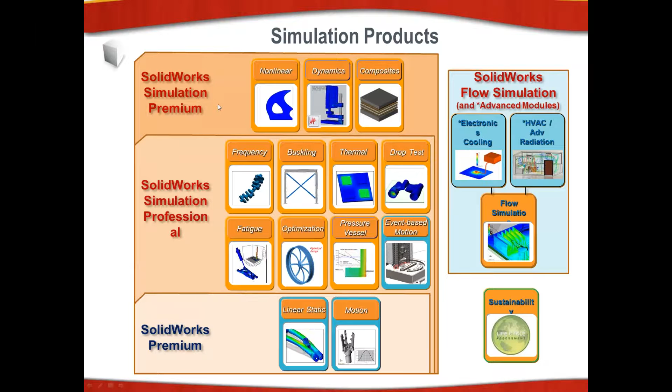All right, so some of the simulation products that we have, we're going to pretty much play in the SOLIDWORKS Premium area right here with some linear statics. We will show you a couple of 2D simplifications, which are in the Professional and Premium products, and just a couple other little cool tips and tricks to kind of get you where you need to be.

So let's start off with the simple little bracket. One of the things that I like to do is to simplify with configurations. Occasionally the actual model that you manufacture may have a lot of extra detail on it that we can pretty much neglect when we're doing our FEA analysis, our stress. So a lot of times I'll remove some small features. I've got some little fillets on here, some little chamfers, so we need to get rid of those things. And you really just have to make assumptions as to whether or not those are necessary features. If they are, then we need to do something about them.

Also, instead of actually modeling up a washer, a lot of times I'll use the split line function, so I'll show you how we can do that. And then in this case, the part is symmetric. In a symmetric part, it's really simple to just slice that thing in half. The main reason we might want to do that is the fewer mesh elements we have, the faster it is going to solve.

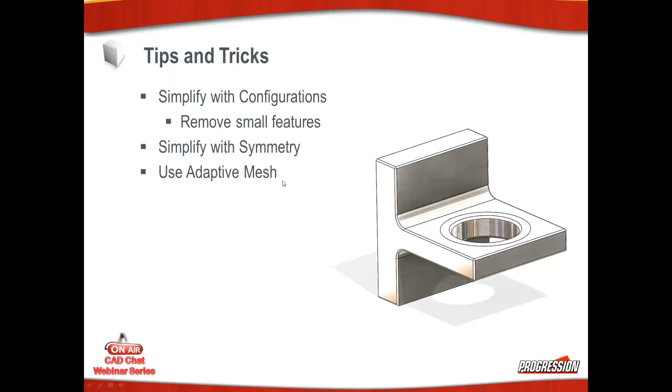And then the last thing I'm going to show is if you can't figure out exactly where your higher stresses are going to be, and you need to find out where your mesh refinement is going to be, we can use tools called adaptive mesh to get the job done. I'm not big on the PowerPoint, so we're going to go ahead and switch right over to SOLIDWORKS.

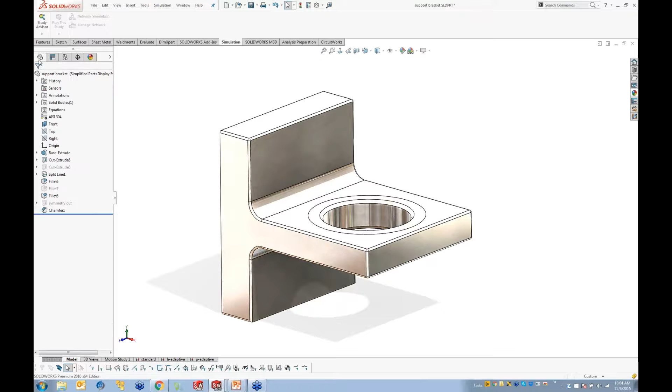So here's my 3D part. The first thing I want to do is create a configuration, and I'm going to do this from scratch. So I'm going to add a configuration and just call it simplified part. There we go. Then all you have to do is come into the features and get rid of what you don't want. I've got this extra little chamfer on here, so I'll suppress that. If I delete it, then it's going to delete it from the other configuration, so if I have a drawing off of it, that's not going to be a very good deal. I need to just suppress it so it's only for this active configuration.

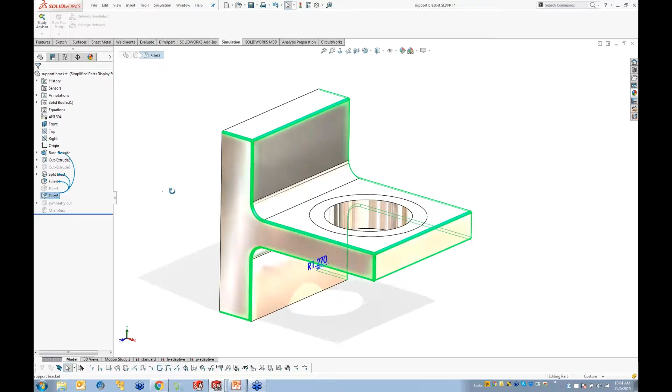You can see I've got all these extra little fillets on there, so we need to do the same thing and just suppress those. And also, if I know that this is symmetric, then I can do symmetry across the side of this thing, and I've already got a cut that I can do that with.

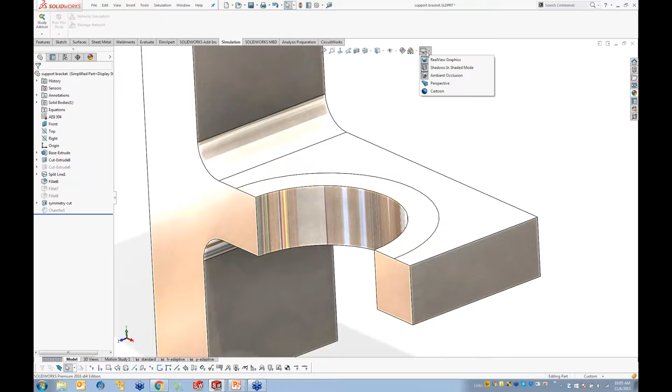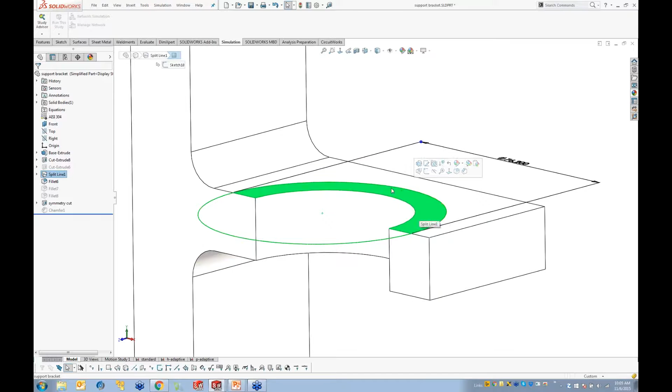Now, across the face of this, let me turn off RealView graphics. You can see this face and the face right next to it. They are coplanar, along the exact same plane. But in stress analysis, a lot of times we want to break that up, if I want to put a washer or something like that on there, or signify I'm actually putting a stress or pressure across an area, and I don't want it across the entire area. So I'm going to show you how to quickly do that.

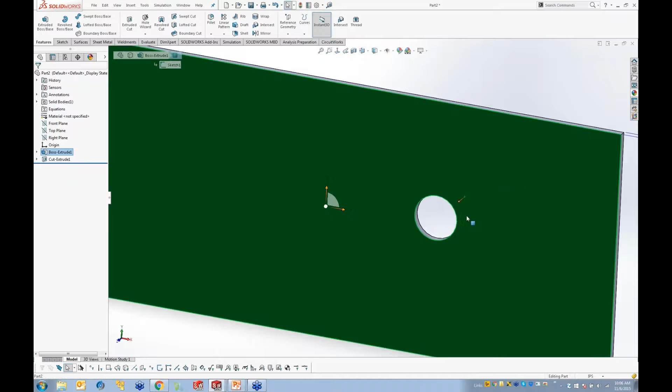I'm just going to start from scratch real quick. I'll sketch a little square block and just extrude it. Say, for instance, I want to have a hole in here, so I'll just draw out a circle. Now if I want the pressure on the outside of this to signify a washer or something like that, what we do is a new sketch, and we'll go ahead and draw a circle.

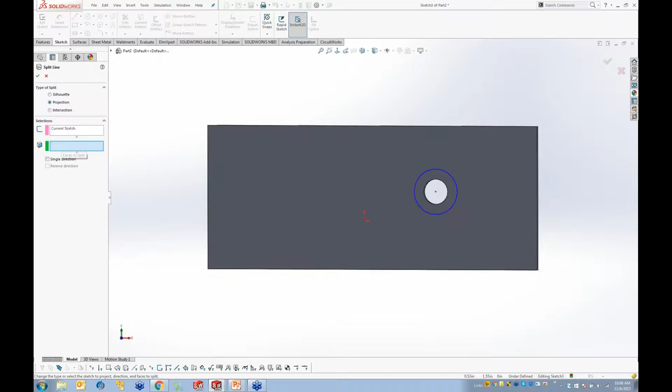And then that's it. Of course, I want to dimension it and everything. Then we're going to go to Insert, Curve, and do what's called a split line. So the split line is going to use the active sketch, and then you have to tell it what face you want to actually split. So it actually goes normal to the sketch. So I can split this face, or if I have a washer on the bottom, then I may want to pick on that back face as well.

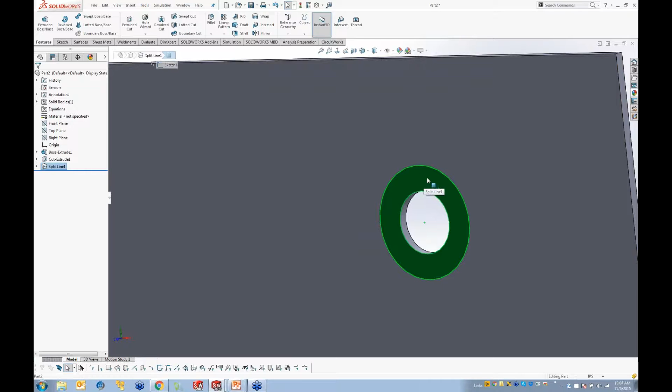So when I hit OK, you'll notice what it does is it superimposes that sketch, and now I have a face that I can select that's going to be separate than the entire face. So that way, if I just want to push a pressure or a force on a specific area, I can use the split line to do that. So that's a really good technique to use. Keeps me from having to model up a lot of stuff.

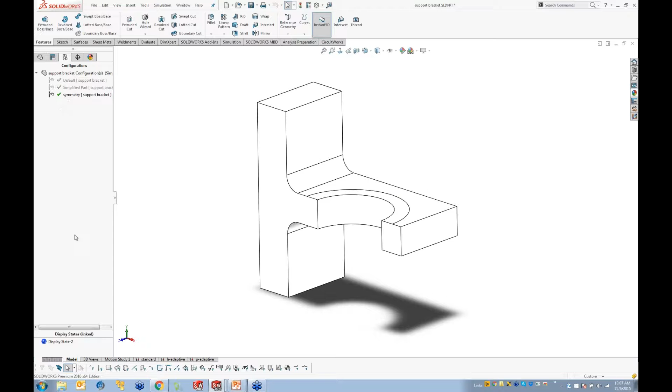All right, so I've got my part here. I've simplified it. I've cut it in half because it's symmetric. So let's go ahead and run some stuff. I'm going to go to my symmetry configuration, and each of the different studies that you do are configuration specific. So I've got a standard one. I'm going to go ahead and just do a quick mesh on this so we can see what that looks like. And I'm just going to accept the defaults, and we'll go ahead and turn off our simulation symbols.

So it's a fairly coarse mesh. The good thing is I do have at least 2 elements through the thickness of the material. So that's a really good tip. If I don't have more than 2 elements across the thickness of the material, then the strain is not going to be very good. It's not going to have the ability to actually bend across the thickness. So I'll get some pretty poor results.

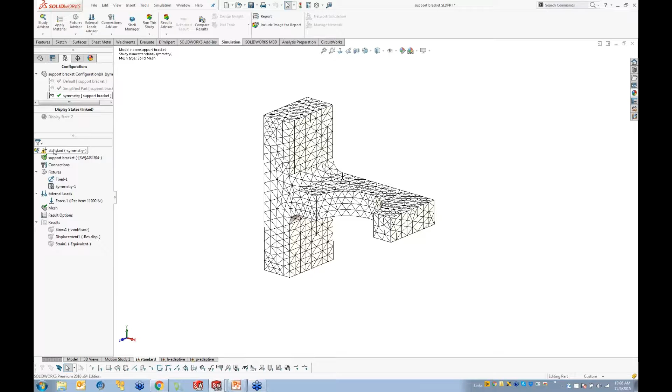So anytime you're doing sheet metal parts and stuff, if you are doing it as 3D instead of shells, just make sure that you have at least 2 elements across the thickness. So here I've got 4. I'm actually pretty good on this one. So let's go ahead and run it. It doesn't take too long to run this guy.

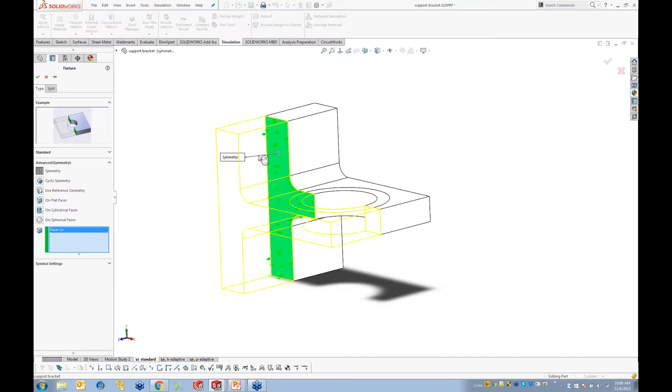And I guess I should have showed you, I did put symmetry on here. So we do have a tool, a fixture specifically for symmetry. Make sure when you're doing symmetry that you select both of the faces, because even though if I just select on one face, it looks like it's showing me what the symmetric results look like, that's not the case. Really what happens is at the actual node level, we're really just restraining the degree of freedom to actually go, in this case, across the Z direction.

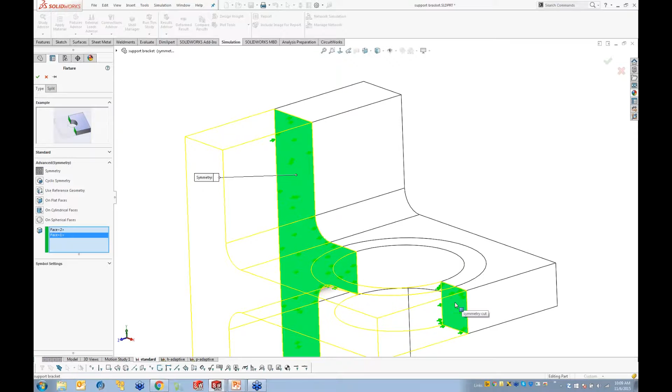So if those nodes can't move across the Z direction and it expands, it has to expand outward, in this case, the negative Z direction. So when you do symmetric, you've got to make sure that you select on both of the faces. Because again, we're not actually doing like a mirror command or feature or anything like that. All we're doing is all the nodes across that face, we're just constraining them so they can't move in that Z direction. They can move along the Y and the X, which is fine, but the nodes can't move along the Z. So they're static there. All right, so that looks good. I've gone ahead and run it.

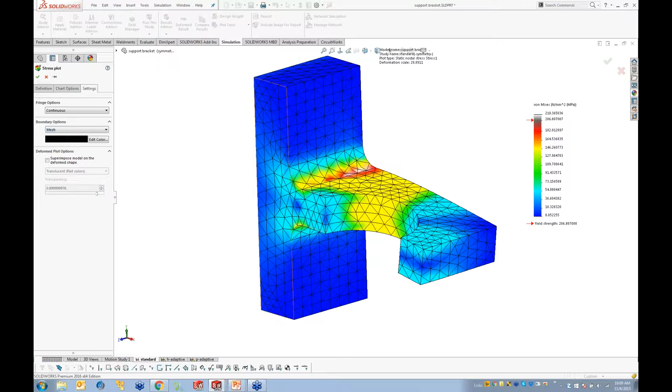Another little tip and trick, I didn't put it on PowerPoint, but a lot of times on the stress results, let's go ahead and edit that. So just double click it. I usually go to the settings tab and I change the boundary options to the mesh. And what that does is it superimposes the mesh on top of the stress, in this case the von Mises stress. And here you can see I've got kind of a bit of an issue.

So one of the questions a lot of people ask is, how do I know if it's a good result or not? And here, if I start to get splotchy results, then I know that my mesh elements are a little bit too large. So in this case, really what we're doing is we're color coding. We have a little color chart over here, and we color code the chart depending on what the average or what the actual stress amount is on each of the nodes.

So if I know what the stress at the node is here, here, and here, then I color code it based on what the chart is. So here I get a little bit of an issue: I've got some very high stresses and then some very low stresses. So you'll see at each of these different little nodes, it's starting to get a little bit splotchy. It's a lot zigzaggy and stuff like that.

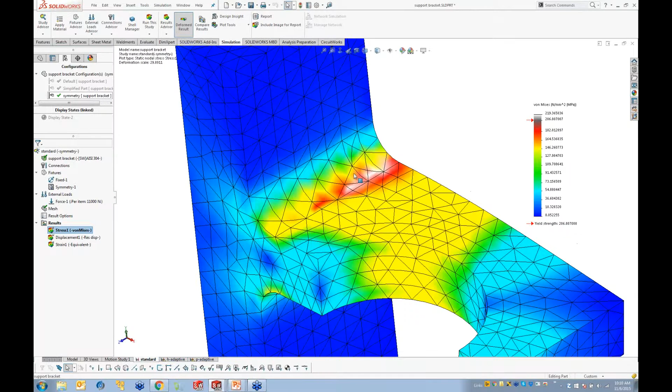So I want to make sure that the stresses are converged and I get a little bit nicer, smoother shape on there. Now there's 2 ways we could do that. Of course, I could just go to my mesh, right click and say apply mesh control, and then I can select a face or something that I want to do the mesh control on. But sometimes if it's a simple part, then we can have the software automate that for us. So we have 2 little options that we can do that with.

So one is called PAdaptive. To get to the settings, you just right click on your study, go to the properties, and then there's an adaptive tab when you're doing a static analysis. So I've gone ahead and turned on PAdaptive. So what this does is at each mesh element, it's going to go to a higher order mesh. I should say not mesh, but a higher element node.

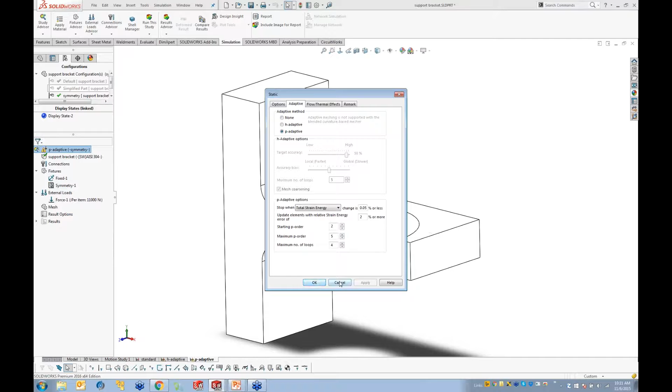So I'll take a look at my mesh real quick. Let's create a mesh. So what happens here is I have what are called mid-side nodes. So I have a node at this little location, I have a mid-side node, one right there, and then I have another node. So this is called a second order. A first order element really only has a node at the very beginning and a node at the very end, and these would be straight line segments. That's in a draft quality element.

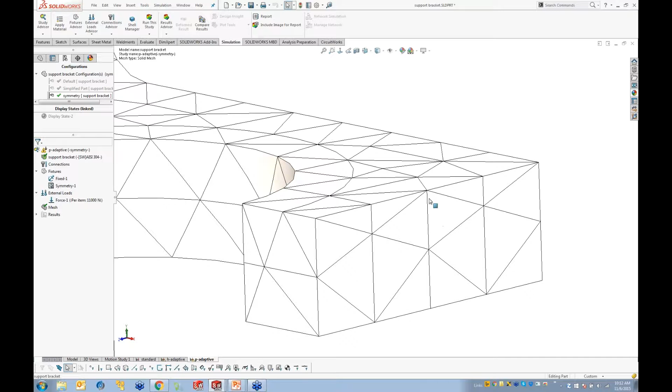So what we're going to do in PAdaptive mesh is we're going to take the nodes that we have across these things and we're going to break it up. So the second order is, of course, I split it in half. So I actually have across each of these different lines 1, 2, 3 different nodes. So what PAdaptive does is it finds out where the stresses are higher and it's going to break up these lines into more nodes. The more nodes I have, the more averages I'll have across there, and hopefully a smoother shape I'll get. So let's go ahead and run this.

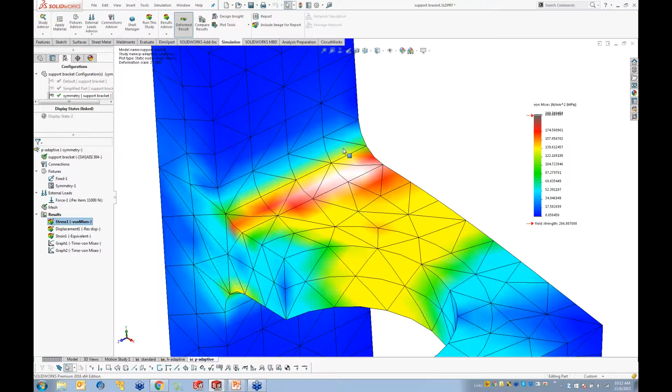Now the way this works and functions is it is an iterative solver. So it's going to run a loop and then another loop and another loop until it meets a certain criteria. And once it meets that criteria, then it's going to show us the results. So this one's a little bit better. Now you can kind of see that I've got a much more coarse shape here, but it's a little bit smoother as far as the gradients going from one color to the next.

This is not my most favorite way of doing an adaptive mesh. My preferred method is a HAdaptive. So let's take a look at that guy. So again, let's right click on that. We'll take a look at the properties, and there's an adaptive tab. So in this case, we can tell it the maximum number of loops, because of course I don't want it to run to infinity. So I'm going to tell it to go maximum 5.

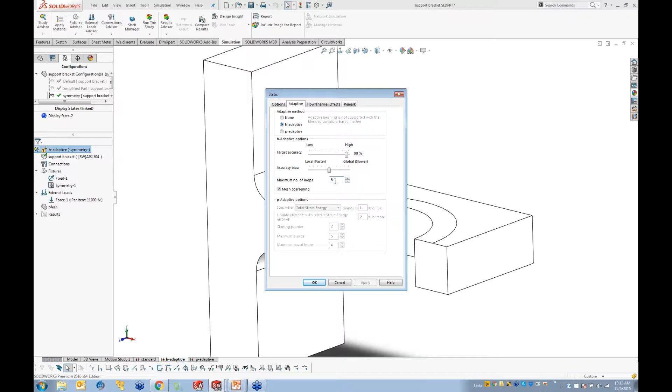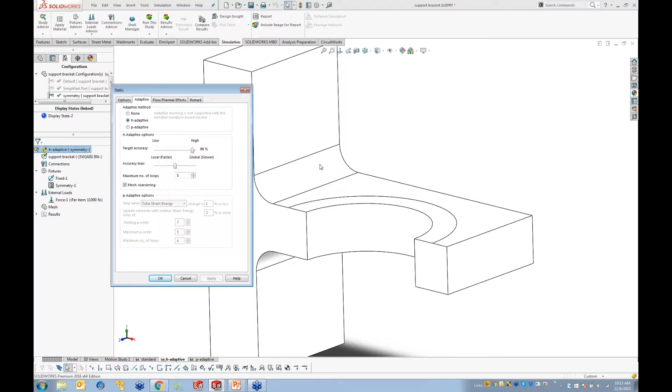But what I'm going to do is find out what the stress values are, and then find out the nodes right next to them, what those averages are, and I'll find out the difference between them. And if the difference between them is within 98%, then we can go ahead and stop. We can quit making the mesh smaller. If it doesn't reach that, if it's 97, then in those areas, we need to make the mesh element smaller. If we make the element smaller, then of course we get more nodes as well. So let's go ahead and run this guy.

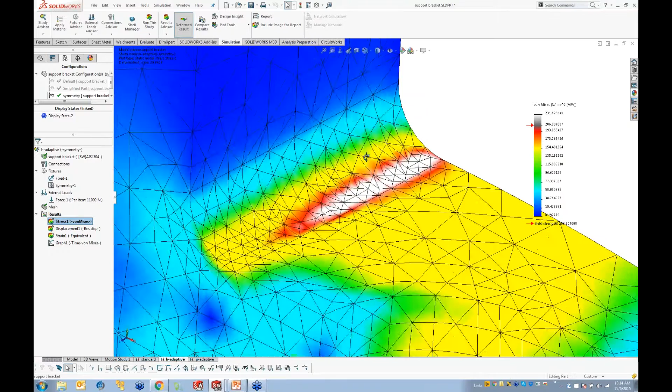So there it's running again. This one I like because you can actually see the mesh adapting. It's getting tighter and tighter. And it went ahead and ran 5 loops. And if we zoom in there, now you can see I get a nice smoother curvature going from blue to the greens all the way up to the reds. And I do have a very high stress in here. This is not a very good part. So I'll probably need to make it a little thicker or something, or change the material.

All right, but you can see that the main thing is that the mesh is getting tighter in the areas where there's higher stress. The other nice thing I like about the HAdaptive is it does mesh coarsening. So areas that don't have as high stress, we don't have to worry about them as much, so it coarsens the mesh so it can still run quite fast. All right, so that's pretty cool. Some good ways to do simplification and sectioning, so we can use symmetry. All right, so let's switch back over to the PowerPoint.

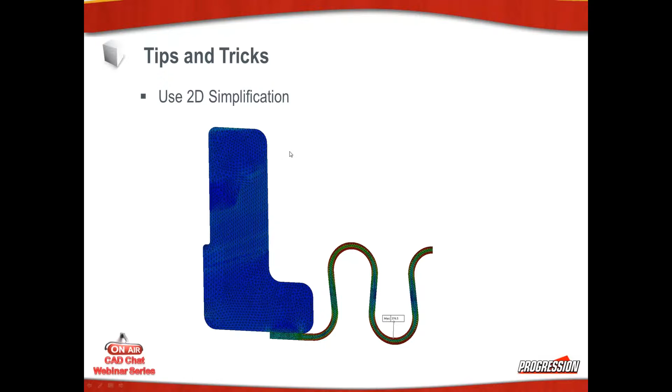So next I'm going to use 2D simplification. The reason why you'd want to do this is, of course, to get a finer mesh. The finer mesh we get, the closer we get to an actual real-world value. And so we can section this guy. This is kind of a nice way to run a high-end mesh and get really good results. But again, you have to make some assumptions as far as where you're going to go on that. So let's go ahead and close out of that.

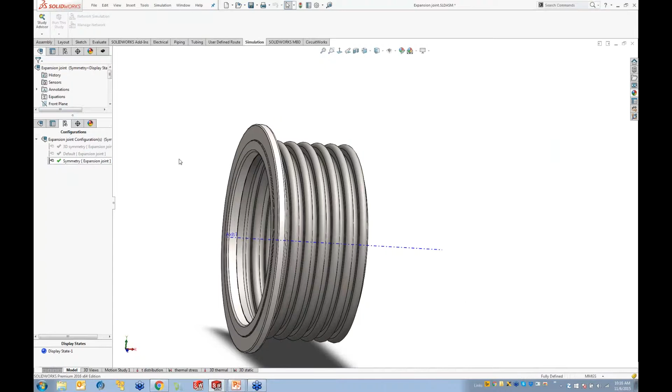So here I have a little baffle, a little expansion joint, and I've already gone ahead and chopped this guy in half. Of course there's another flange on the other side of this, and I have a configuration that shows the default with both of it, and I went ahead and chopped this guy in half. So not only can I chop this guy in half, but I can also do 2D symmetry. So let's take a look at that.

So if I do a new study, say for instance I want to do thermal. Now this is not with SOLIDWORKS Premium, this is going to be with the simulation product, so Simulation Professional and Simulation Premium. There's a little checkbox down here, use 2D simplification, and you just hit OK. When you do that, SOLIDWORKS is going to pull you to a little wizard, so it makes it kind of nice.

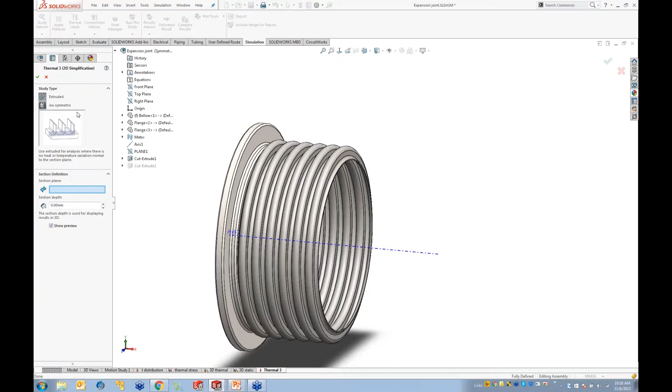So how do you want to use this? Do I want to use an extruded or an axisymmetric? How do I want to actually slice this guy up? I'm going to use axisymmetric, and then the section plane. I've got a plane right there, that front plane, so that slices halfway through there. So that looks good. And then I do need an axis because I'm telling it where the axis is symmetric about. So I'm going to select on that guy.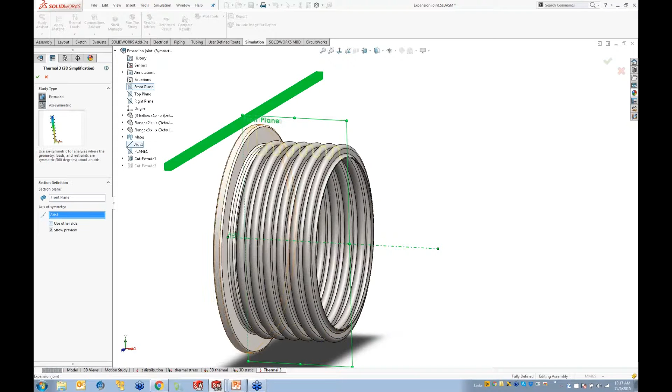When I do that, you'll see a little preview up here at the very top. Now, if this wasn't the one I want and it wasn't exactly symmetric, then I can check the little box for use other side, and you'll see the profile moves down to the bottom. So I'm going to flip it back to the top. I'll go ahead and say OK.

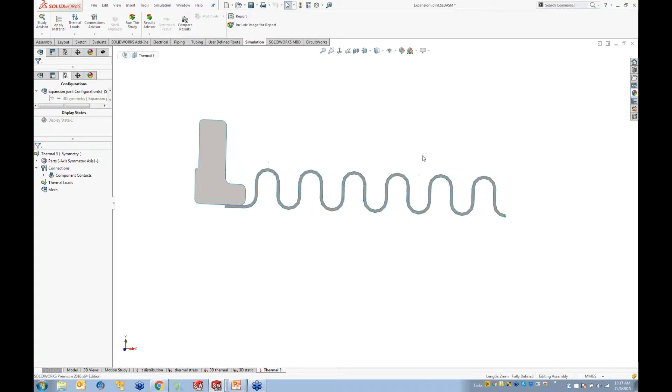And so now what's happened is it's taken a cross section of that expansion joint. And now I can do analysis just on this as if it were a 3D part. So if I need to make connections or fixtures or forces or anything like that, in this case it's thermal, I would actually put some of that information on these edges. Now I've already got one started up, so let's go to this guy and run it. So this runs pretty quick.

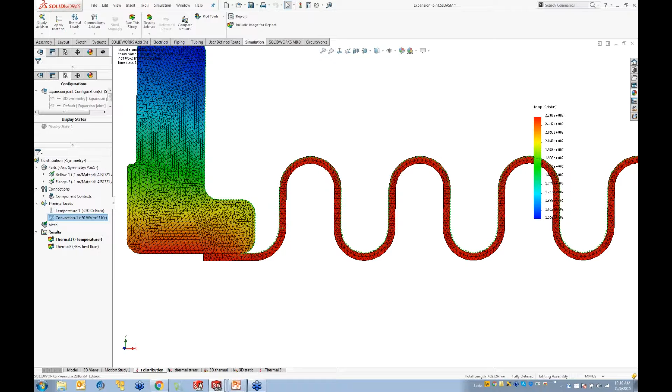And this is a thermal analysis. So I actually have a high temperature inside here. And you can see it's a metal, so it goes right through the thickness of the material. So it's really quick. And then I have convection, and convection is going from the metal out into the air. That way we can eliminate some of the heat from inside going out into the atmosphere. So then, of course, you can see the temperature going from the inside of the flange out to the outside. So that works out pretty good.

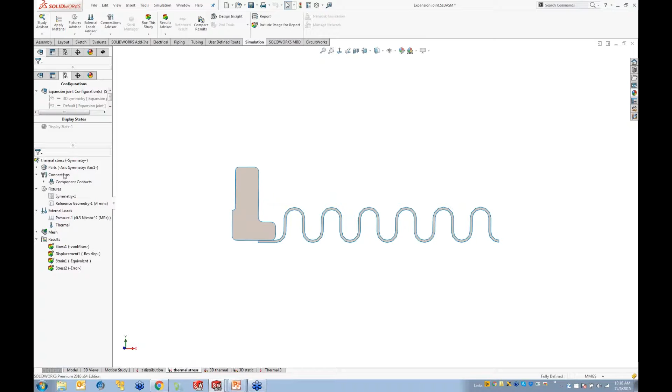So with this, we can also go to a thermal stress. And I've gone ahead and got that ran. So this is actually the stress. The tricky part about this, let's go into the properties, is the information is actually coming from the thermal study. So wherever it's hotter, of course, it's going to want to expand. Now on this thermal stress, it's going to want to expand, but then I've also told this guy to move. So once I bolt this thing in, I actually shrink this guy up. So I've accounted for that: I've got a 4 millimeter difference from the reference geometry right here where it initially starts to its end.

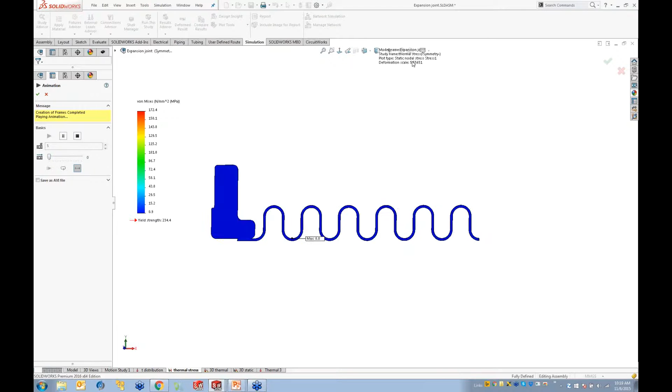So if we take a look at the animation, you can see it's from its initial position going to its final position. Now this deformation scale is about 5 times. And you'll notice that I do have symmetry over here on the right hand side, which is keeping that guy, in this case, moving about the Y direction. So those nodes can't move left and right. They have to stay along that plane.

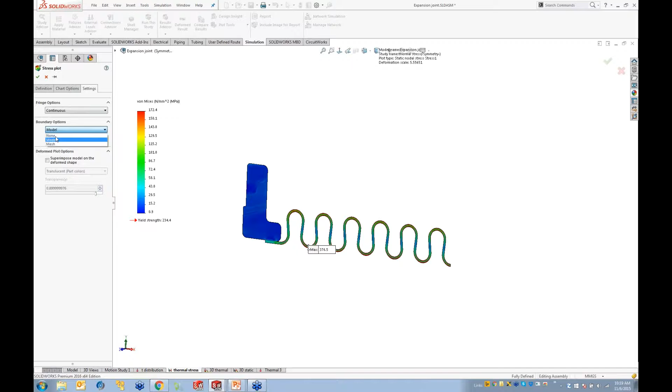All right, so 2D simplification, again, the main reason for this is we want to be able to get a really good high-end mesh. So I'm going to go ahead and turn on my mesh. You can see I've got a really fine mesh. This is a really thin part, and I've still got 4 elements through the thickness of that thing. If I were to do that in 3D, this would have millions of elements. SOLIDWORKS Simulation will do it, but it's going to take a lot longer. This solved in just a couple seconds. If I did the other one, it would probably take about 20, maybe 30 minutes.

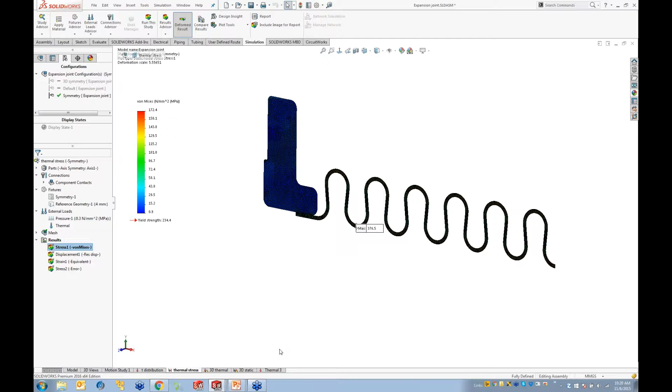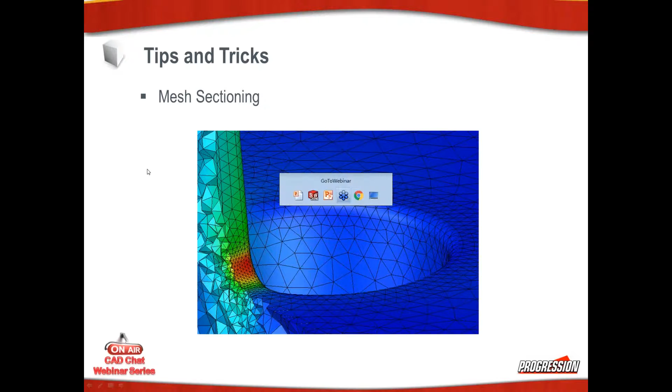All right, so use 2D simplification. Next, I'm going to go into some new tools. These are some nice little tips and tricks that are for 2016. So if you guys haven't upgraded yet, then please do. 2016, I've been very happy with its performance, functionality, and stability, really.

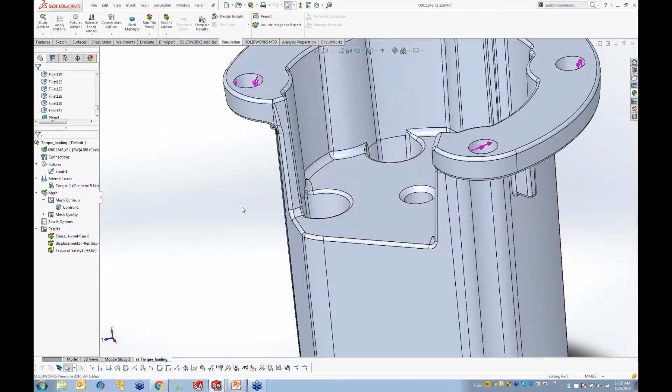All right, so let's take a look at this guy. So this is part of a little robot, and he has some really high torque values. So what I've done is I have done some mesh control. So in some of these little areas, you can kind of see the highlighted areas. I've meshed it to where it's pretty fine in those areas, and then of course the mesh control grows out to the other areas of the mesh.

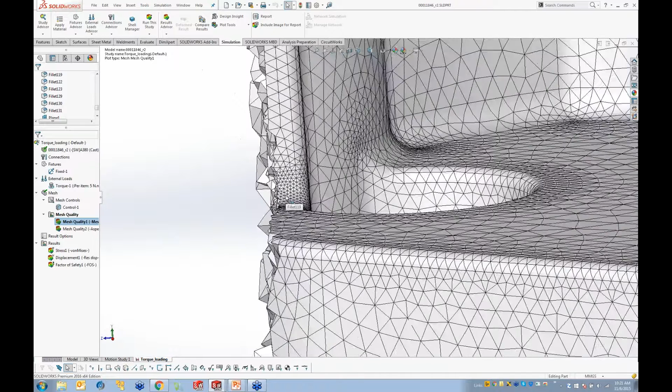So one of the new features is, let me go ahead and double click this, it's going to take it a little while to load in, is we can section the mesh, and we can look at the quality of the mesh through a section plane. So in this case I selected on a plane, and where the plane slices through the mesh element, we actually see the entire element. So where the mesh elements are smaller, you'll see little small elements. Where the section plane slices through the larger elements, we of course see, looks like bigger mountains in the background.

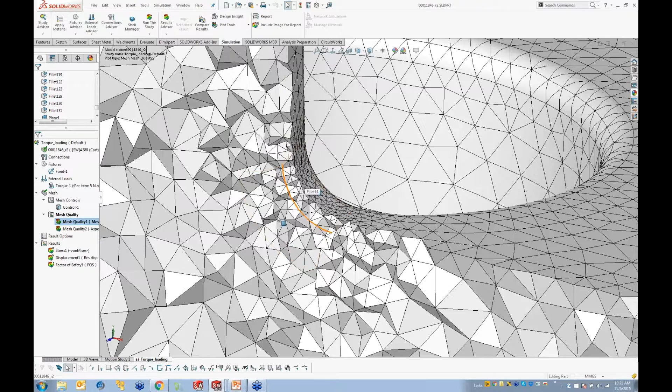Okay, but what this allows us to do is actually look at the mesh quality through the thickness of the material. So we didn't have that ability. Now, in 2016, we also have a couple of the other nice little buttons. We've always had the ability to do a section on the stress. So I'm showing a von Mises stress. So I can right click and do section clipping. So we've always had the ability to do that. That looks really nice and smooth.

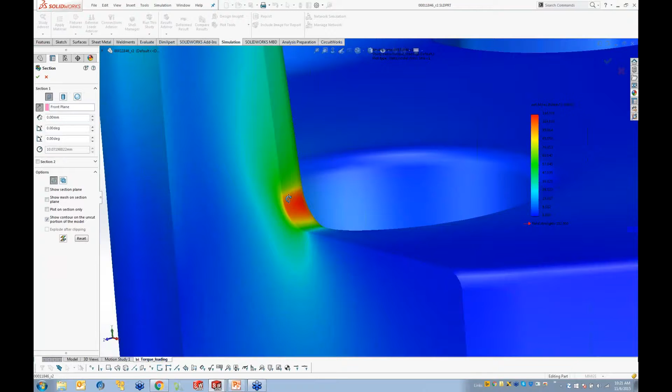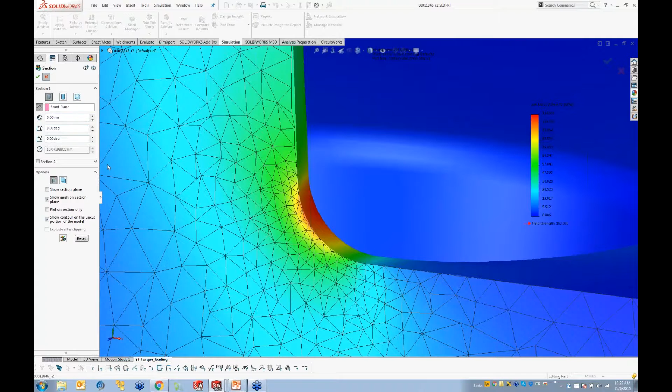But now we have a little option that we can show the mesh on the section plane. Now, since the section plane is slicing through the mesh elements at weird angles and stuff, what it does is it just superimposes that mesh onto that flat plane. So that way we get a pretty nice little section of what that thing looks like. Now, if you want to actually see the 3D, then we've got a button for that as well. So if I right click on the stress value, this is the new button in 2016. It's called mesh sectioning. So select on that, give it a second to load in.

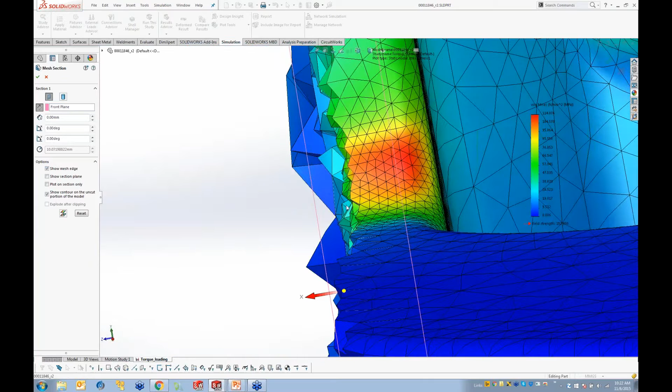And then I like to actually show the mesh edge, so that way I can see all the different little black lines in there. And so kind of same thing on the mesh control. I can see the colors of the von Mises stress. So I'm actually looking at, again, the averages of each of the different nodes, and they're color coded depending on what the stress value is. So that's a really cool little tool. That's pretty nice. Some good functionality. All right.

With that, we'll go into reference geometry. So a nice little thing, this is going to be a nonlinear study. So this is our high-end nonlinear package. Whenever we're doing a lot of plastic parts or O-rings or even some metal seals where the metal is actually bending a lot, we have large deformation, then we have to use the nonlinear package for that. And that's our high-end package.

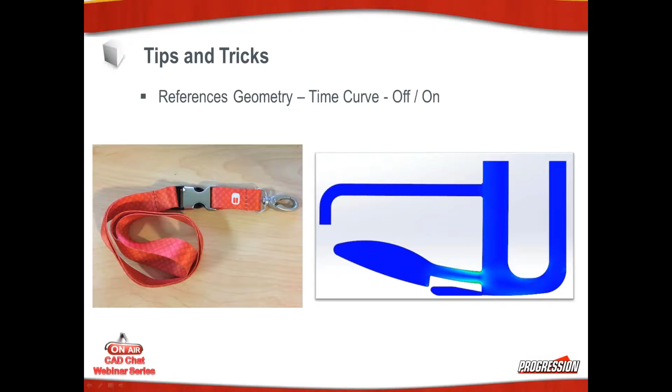So let's go take a look. So I've got this little buckle, and I've got a plastic part. So it's going into a metal part. The metal doesn't want to move. So this little piece right down here is my piece of metal. And then the rest of this is all plastic. So of course, what you have to do is push this guy in. So let's take a look at how we set this guy up in SOLIDWORKS.

So I've got a 3D part, and of course it's going to run faster if I do 2D simplification. I've already got a nonlinear study that started with this, and that looks pretty good. So I've got a couple things. The setup on this, I'm using symmetry here because I've only modeled half of it, so it's symmetric about the top.

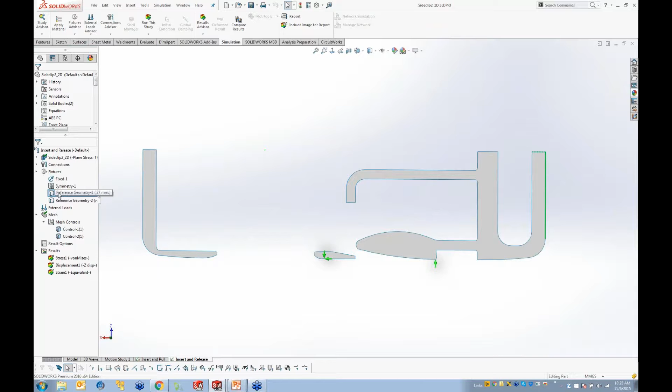I do have reference geometry, so let's edit this. In this case, what I need to do is push the clip in. So this edge right here, instead of putting a force on it, I'm going to tell it that there's a displacement. I'm going to say this line has to move over to the left 27 millimeters.

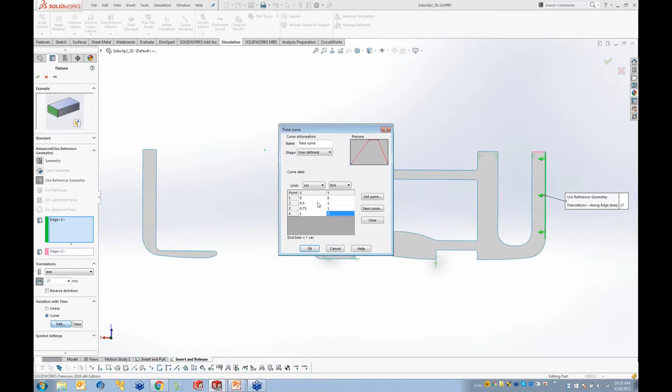But then I also need to pull the clip out, so to do that we use a variation with time. I'll go ahead and view the little curve here. In the graph, at 0 seconds it just sits there, and then at half a second it gets fully pushed in, to 27 millimeters. Then I'm going to hold it there at 27 millimeters for a little while, 0.25 seconds.

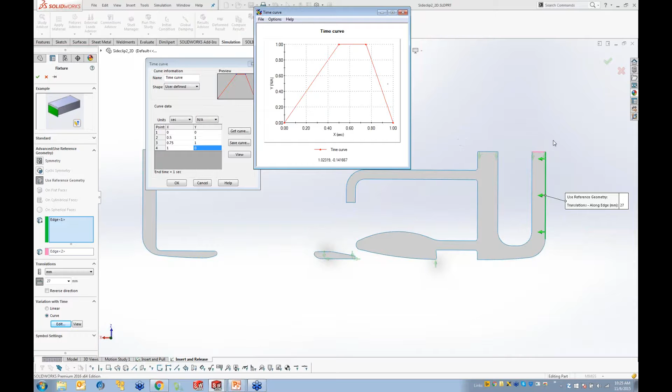And then from 0.75 to 1 second, so a quarter of a second, I'm going to pull that thing back out. I'm actually going to pull it out pretty quick compared to how much I push it in. We could actually do that with 2015. But here's the new thing in 2016.

So this little point right here is actually pushing upward. On my clip, I have to use my fingers to actually push the clip up. So in this case, I have to put a little reference geometry, put a little vertex on there, and I'm going to do the same thing with time. But in this case, I could actually turn the entire feature off, so I'm not even going to use it right now.

So I'm just pushing this guy in, just like I can't really have fingers there, so I'm just going to push it in. Once it pushes in and clips, then I'm going to go ahead and turn it on at 0.61 seconds, so that's going to push it up.

Once I push it up, it's going to start to pull back a little bit. After 0.75 seconds, it's going to start pulling back. So at 0.77 seconds, I'm going to go ahead and turn it back off, so we'll see it start to drag across there. That's a nice little cool thing.

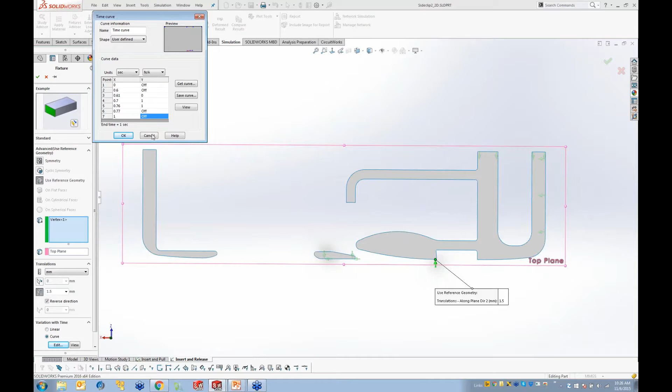So let's go ahead and take a look at the stress results, and we'll go ahead and animate that, and I'll zoom in. So you'll see the max stress is starting to change. The plastic is starting to bend a whole bunch right here. We're also getting some contact pressure, and then it's going to drop.

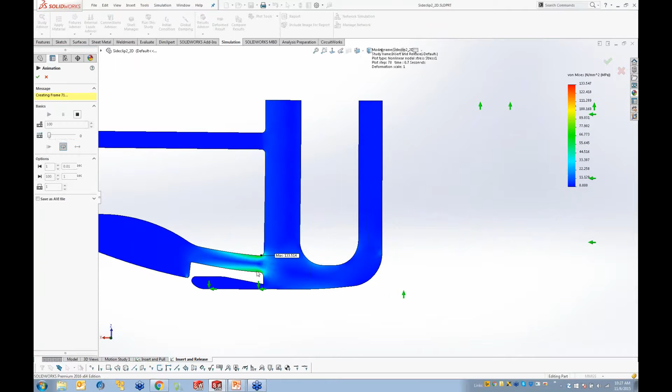Then I turn on that reference geometry, we're going to push it up. We're still getting some more stress here. And then I'm going to drop it, and you see a little bit of stress coming back down through there. So this is a really good technique because I'm starting to get not only pressure contact and stuff, but it's almost like motion and simulation at the same time.

So that's pretty cool. All right, my last little tip and trick is playing with underconstrained bodies. So we can see how we can do some stuff with that. That's always kind of a bit of an issue.

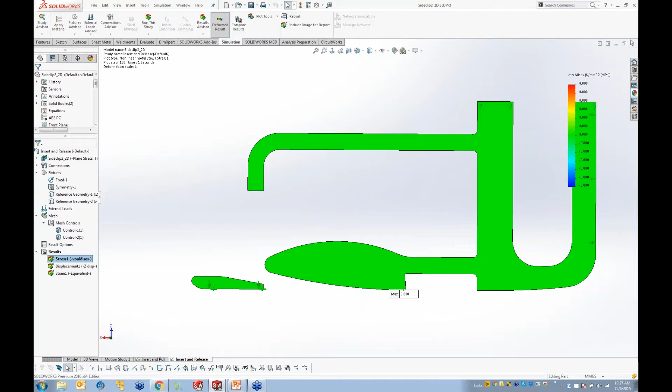So I'm actually going to start from scratch on this real quick, and I'm just going to sketch on the front plane. So here's kind of the issue. I'm going to do a spline and just draw a straight length spline right there.

Looks good. And say, for instance, this is my part file. In my part file, if I put a force on it, if I put a force up, it just moves the entire thing. If I put a force down, it moves it. If I push it right or left, it's just going to move the entire thing.

So what do we have to do when we're doing a static analysis? We have to lock, we have to fix something in space. Since I'm on a 2D plane, I'm going to fix that. And the other thing I'm going to do is this little point right here, I'm going to go ahead and make that a fix relationship. So now what happens is this guy is fixed in the X and the Y.

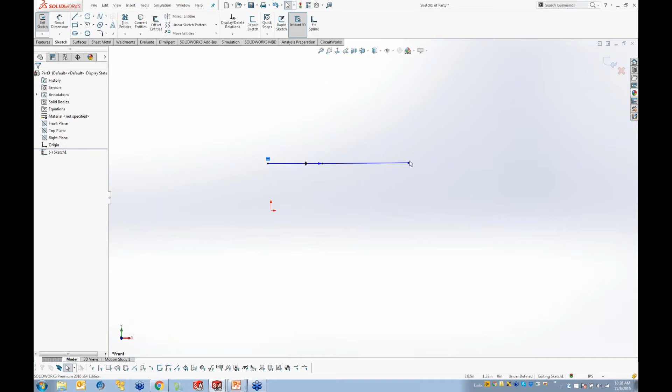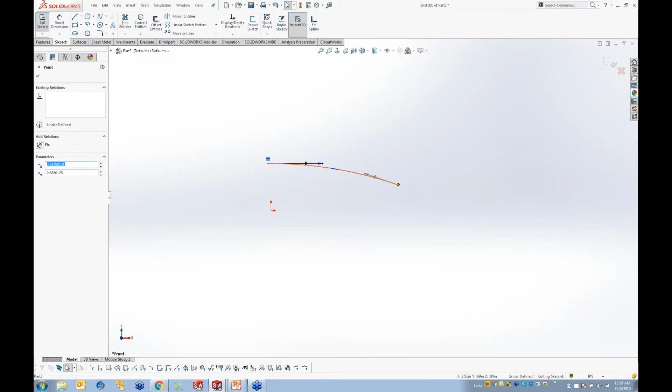He can't move. So now when I start to drag this guy, you can see I'm starting to put some type of force along the entire system. So that's the whole issue - sometimes when we get to an assembly, I need to make sure that every component is fixed depending on where my fixtures are in X, Y, and Z, and rotations about the X, Y, and Z. So once I can do that, then of course I can put a force or a pressure or a reference geometry to just move it, and I get to start seeing where the transitions and the issues are coming in.

So let's go back to this part.

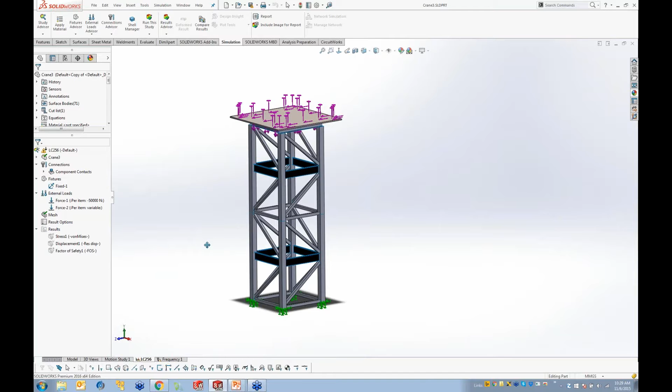So I've got a little structure here, and I've already kind of started it up. I've got a load and stuff on the very top, and down here at the very bottom, I've got some fixtures and stuff, so those are locked into space. So when I try and run this, let's go ahead and just run it.

I'm going to go a little bit over on time, probably about 4 or 5 minutes, but this should be good stuff. All right, so I get a little issue. It says the model's unstable, it can't figure out where something is under constraint.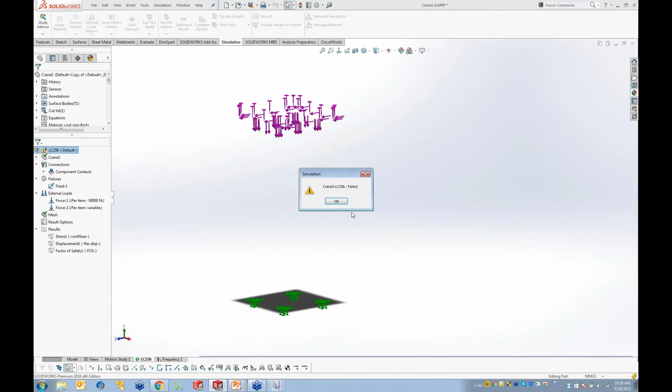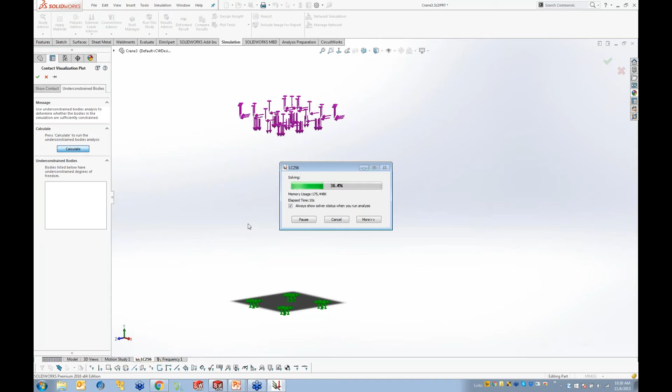I know at the bottom I've fixed these guys in the X, Y, and Z, but some of the other components I'm not sure exactly where they're constrained or not. So one of the new buttons we have is when you go into your contact visualization plot, we have a tab for underconstrained bodies. When we calculate that, it'll take a little while, and it's going to find out, here's your locked position, and then check if the next component next to it is locked. Is it bonded to it or not? If it's not bonded, it can move in the X, the Y, and the Z.

So give that a second, it's just about done. If I click on one of these guys, you can see it highlights it, and it says this guy can move in the X direction. Well, guess what? That same guy can move in the Y direction. And he can move in the Z direction. You can see that he can rotate about the X, the Y, and the Z as well. So we've got an issue where that guy is completely not constrained. He's not connected to anything else.

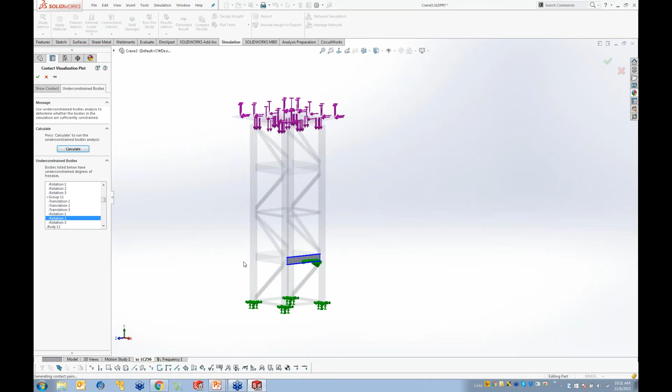Look at, I've got a whole bunch of these groups, so that guy's not doing it either. He's out there. So it looks like my structure up at the top and bottom, the columns are fine, but it's all these members in between that are bad. So this takes a lot of work out of having to go dig and find out which parts are under constrained or not.

So I forgot that when I modeled this up, I put weld gaps in here between the columns and the beams. That's easy to fix in 2016 - all you have to do is edit it, and there's a new button for non-touching faces. So if a node element is, in this case, within 2 millimeters of another node element, it's going to go ahead and make those guys bonded. This is only for bonded contacts. So with that in there, we can go ahead and run it.

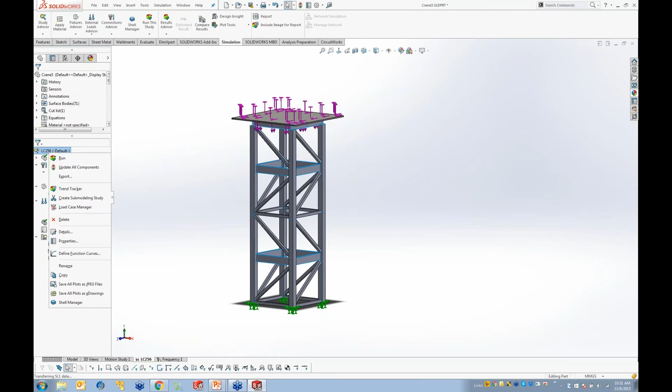So two really nice little features: one, to show the visualization of whether stuff is constrained or not, and two, the ability to, if they're not completely touching because maybe I have a weld gap or something like that, make sure that works and functions.

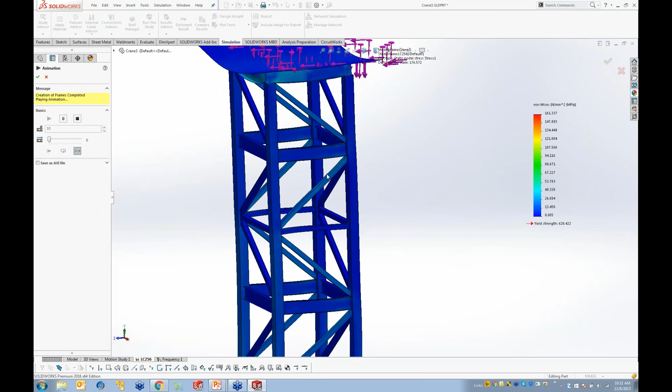All right, so the main thing here is I can see that all of my beams, columns, and members are starting to take stress. They're all moving at the same time, so I know that the bonded contacts are working. Everything's functioning in there - I don't have a part that's just flying out in space somewhere. So that looks pretty good.